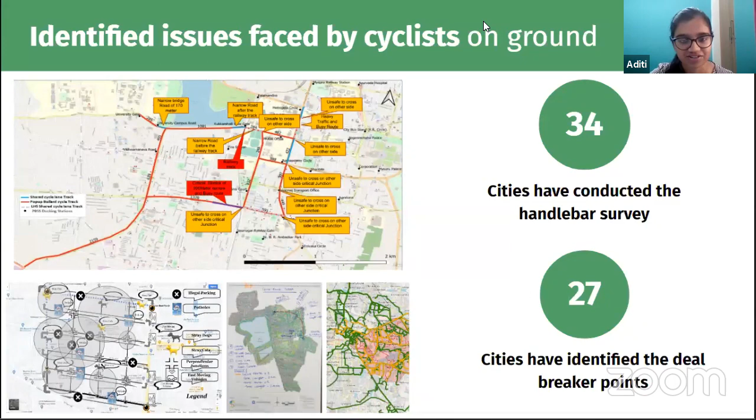Welcome, sir. Thank you so much, Aditi, and a very warm welcome to all the panelists on this panel and also the attendees who are viewing this video conference. Indeed, it's very encouraging to see the poll results first.

I thought, this is the fourth or probably the fifth video conference that we're trying to do, right? So I was thinking that maybe in order to avoid repetition, I will not talk about how good cycling has been and how good this initiative has been. I think the results are for everyone to see. The poll is one such evidence, and data speaks volumes. And I think even within this small subgroup, some of us who have been involved with this challenge, and many of us maybe have not been, but still, it's very encouraging to see the numbers.

Cities have done a lot of effort, and in fact, this is an area wherein not too much discussion was taking place. But over the last few days, ever since this challenge was launched, there has been a lot of buzz that has been created around cycling.

With 45 cities having launched various initiatives to engage citizens from around the country, 15 cities have launched open street campaigns for cycle training. Almost 34 cities have conducted handlebar surveys and identified locations to transform for cycling. Over 370 kilometers of corridor and 400 square kilometers of neighborhood areas have been selected for this cycling transformation that we'll be witnessing over the coming days.

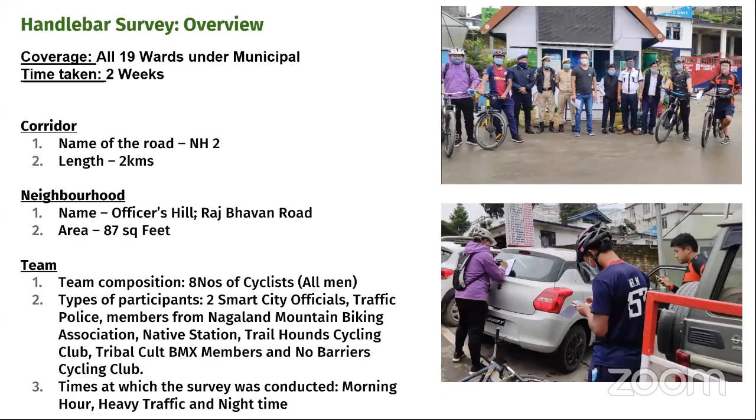As you can see in the slide, the municipal area of Kohima is just about 10 square kilometers, much smaller than other cities in the plains, so it was easier for us to survey the entire municipal roads in a short span of time.

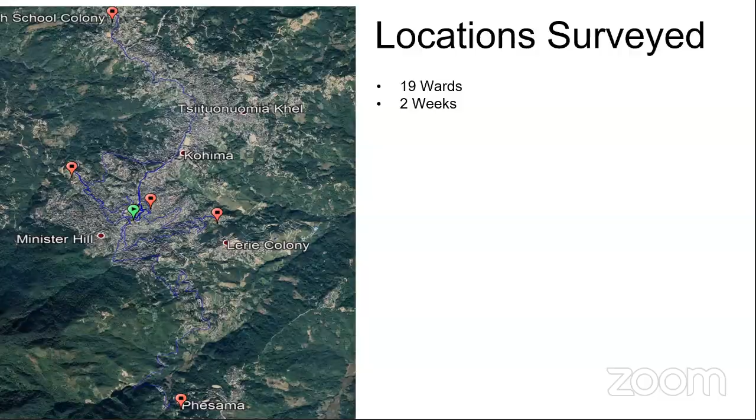Here are some of the photos captured during the survey. Out of the surveyed locations, we have selected this corridor for the pilot. The reasons for selection are that the identified stretch connects 2 major markets in Kohima, the BOC market area in the extreme south and the town area market in the north, and this lies on the central spine of the city's morphology.

Besides that, we have 2 multi-level car parking facilities coming up under smart city projects, both on the north and south. Hence we plan to implement a bicycle rental scheme once they are completed. The concept is: people come to the city in their cars, park in the multi-level car parking facility, and right there we will introduce rental bikes for city commute. That's the concept behind selecting this corridor.

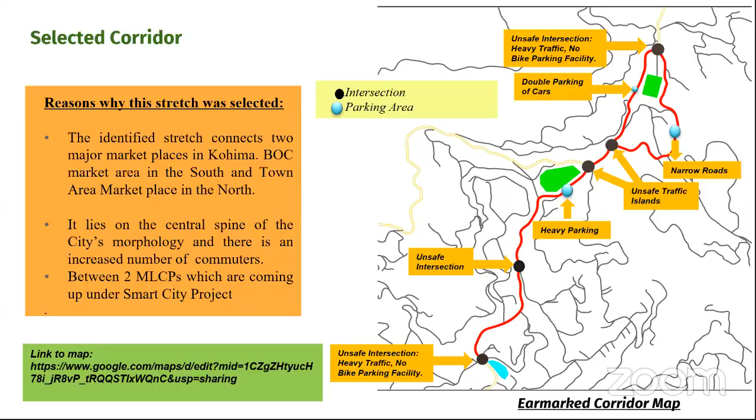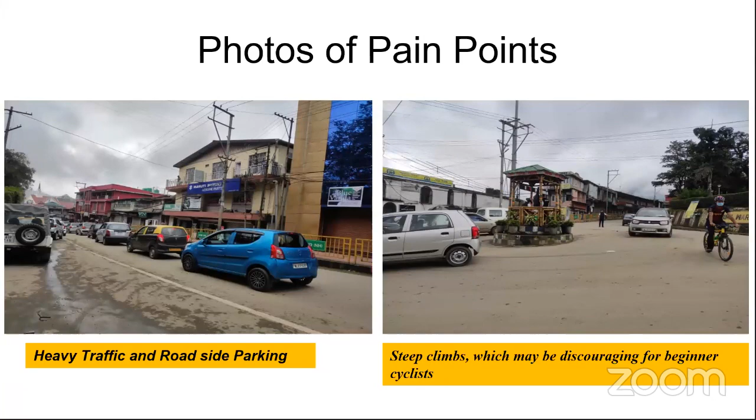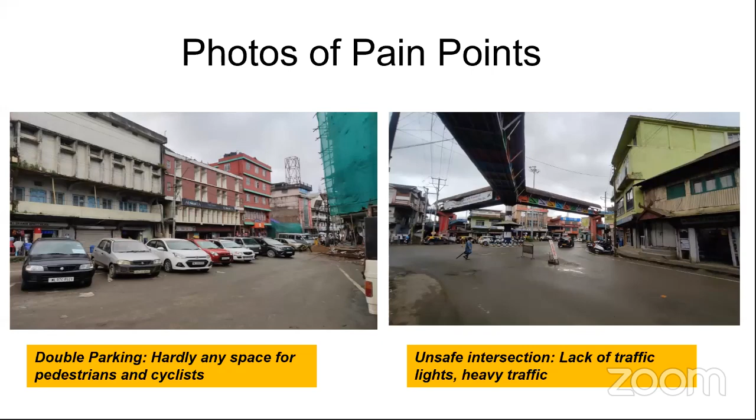We have also identified and marked some pain points from the Handlebar survey, such as heavy traffic, roadside parking, and steep climbs which might discourage cyclists. We have double parking happening in most of the stretches and unsafe intersections, such as intersections without traffic lights and with heavy traffic. These are some of the pain points we identified.

Coming to the identification of neighborhood, we identified one for the pilot, just adjacent to the corridor as per the guidelines. The reason for selecting this neighborhood is that citizens from all walks of life gather here for recreational activities like running, cycling, and jogging, and the place comes to life particularly in the evening with young people gathering for fitness activities. It is pertinent to undertake an urban transformation intervention in this heritage circle by providing basic infrastructure like proper lighting, exercise bars, and cycle stands with greeneries, which can set a new benchmark towards achieving Kohima's urban transformation objectives.

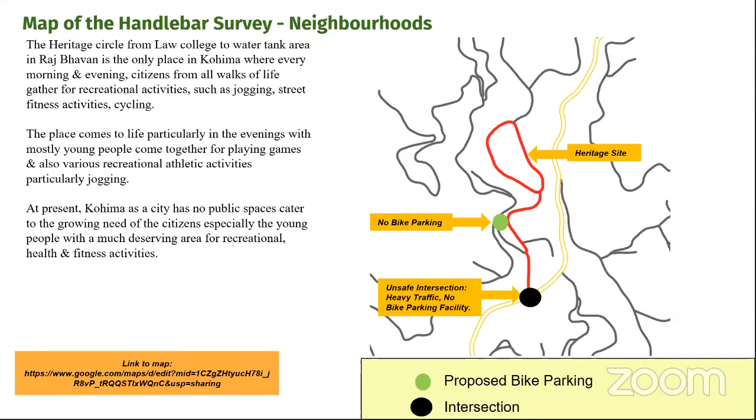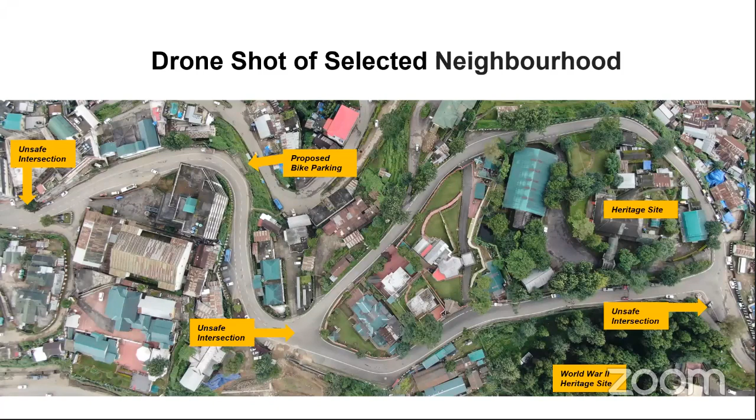2 major deal breakers which we have identified are poor lighting, which makes it extremely unsafe to ride in the evening or at night, and unmanaged and unregulated traffic, with overspeeding of cars in the narrow roads. Those are the 2 major deal breakers Kohima identified from the Handlebar survey.

We've also taken a short analysis from all the surveys conducted. Kohima's strengths include community participation, it's very safe for women to be on the roads even in the evening and at night, and we have good urban roads and a friendly neighborhood. Some weaknesses are poor street lighting and limited road width for cycle lanes, since Kohima is not like other metropolitan cities—it's a hill station, and the roads are quite narrow to have dedicated cycling infrastructure.

Some opportunities are a large, enthusiastic younger generation, and hub-and-spoke cycling trails within and around Kohima for adventure tourism. Kohima Smart City is also exploring ways to promote mountain biking as part of cycling for adventure tourism. The threats include unregulated vehicle traffic, unsafe intersections, double parking, and potholes in some of the interiors of Kohima.

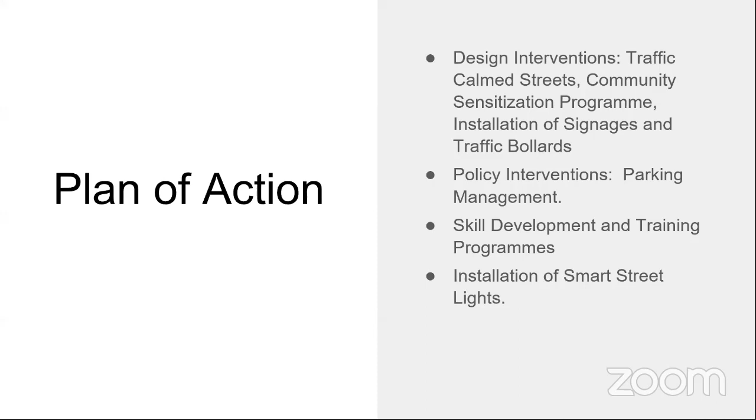Thanks a lot, Atoba. That was a very nice presentation about what you have done so far under the Handlebar survey and some ideas on how to take things forward. I would like to ask you a question about what do you think would be your principal challenges in now moving from the Handlebar survey towards creating design solutions and implementing them?

One major issue which we would face is for the parking facilities. We have actually two multi-level car parking facilities, which is coming up under the smart city project, but which will be completed only after 2 years. So now to have a traffic management system in place, and given the fact that we have shops all across the roads in Kohima, we really need to take into account the opinions of the stakeholders, of the public, to take certain policy decisions to help manage the traffic and the parking around Kohima.

Sure. So we would later in the session today speak about parking, because parking is quite a vexing issue which many cities are dealing with, and it's critical that we get parking right if we want to get cycling right.

So the question I would have next for you, Atoba, is who are the stakeholders? As in you said, you would have to work with the shopkeepers. Who else do you think you need to work with to make sure that you could have a successful parking management system? Yes, as far as Kohima is concerned, the stakeholders will be the shop owners, first of all, and then the second would be the land owners.

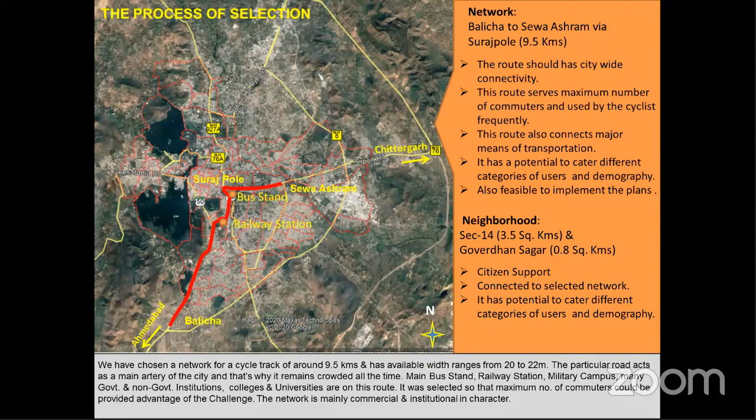For the neighborhood, we chose two neighborhoods. Neighborhood 1 is called Sector 14, the largest residential sector of Udaipur. It contains neighborhood schools, colleges, institutions, clinics, commercial sub-centers, etc. Since it is the largest residential sector, we got very good citizen support from this site.

We also preferred this route as it is connected to a selected network, so we wanted an end-to-end approach or circle to promote this. Also, it has potential to cater to all categories of users and demography.

In the second neighborhood, there is a water body called Goverdhan Sagar. It served as a major tourist point for both citizens and tourists. People actually walk, cycle, and jog around the Sagar daily in the morning and evening.

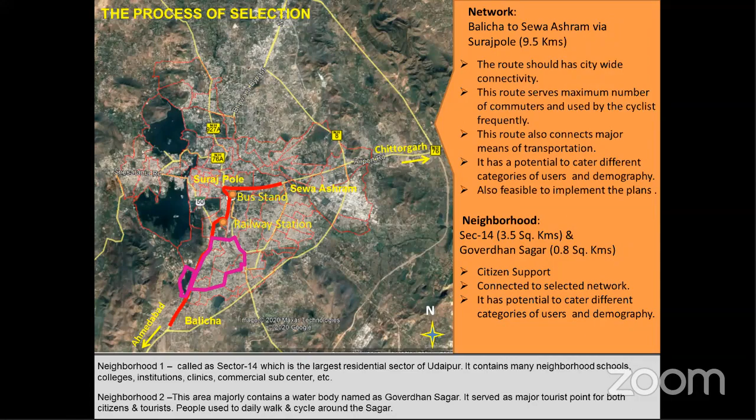Coming to the Handlebar Survey, before conducting it on the ground, we went for various meetings with stakeholders - traffic police department, citizen representatives, city officials. On the left side, these are some images we shared while conducting meetings, both official and non-official.

Parallelly, we also went through feedback forms using an online method. We took support of Instagram, Facebook, and Twitter so that we could reach the maximum number of people and get the maximum number of suggestions from citizens.

We also framed WhatsApp messages to forward to both official and non-official groups. The major agenda was to reach the maximum number of people. We also approached various schools and colleges to get suggestions from students' and teachers' points of view.

We also prepared a base map for that area so we could locate schools and colleges, government institutions, non-government facilities, amenities, and the local market area.

So we conducted the Handlebar survey. On my right side, these are some images we shared which were clicked while conducting the Handlebar survey.

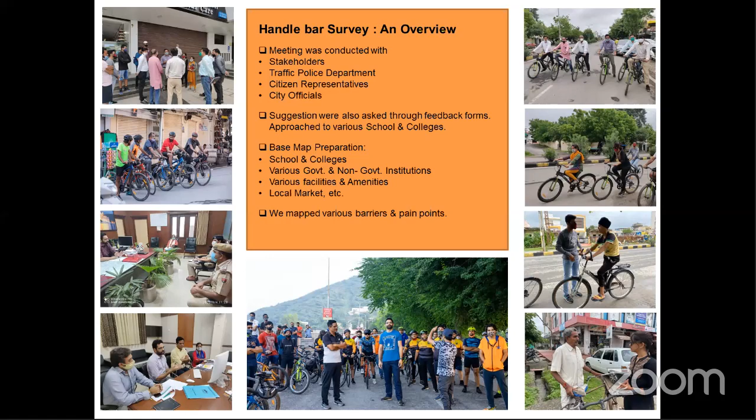We came to know about various points, pain points, and barriers, and we mapped it on paper. This is a 9.5-kilometer stretch. We found various pain points such as fast moving traffic, dangerous junctions, blind turns, obstruction by parking, hawkers, and many more.

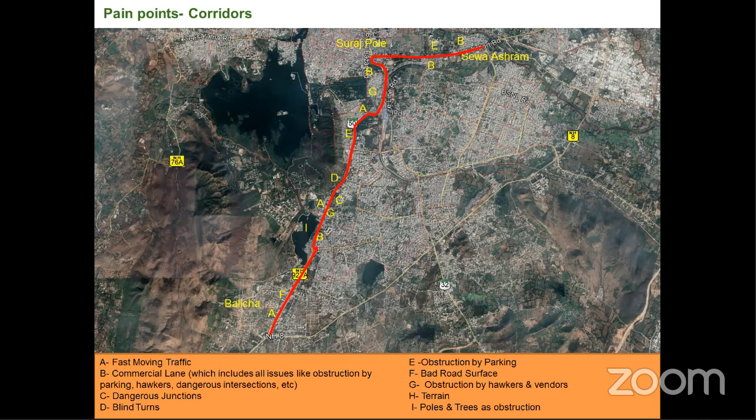Coming to specific points, in the first image the road width is good, around 10 to 11 meters. After a carriageway of 7.5 meters, still space is left, and therefore vehicles move at very high speed over there. So it needs a plan to ensure cyclist safety.

In the second picture, you can see it is a commercial lane. The carriageway is not that much, hardly 8 to 9 meters, yet vehicles still move at very high speed over there.

The third image is an intersection at Suraj Pole. As you can see, there is movement of heavy vehicles, which leads to congestion and again raises a question mark for cyclist safety.

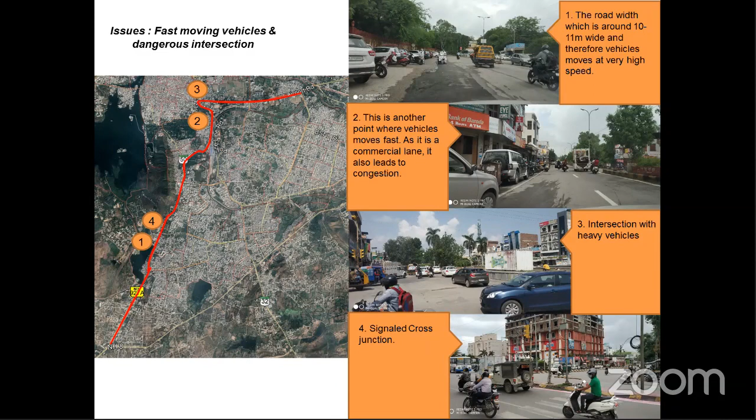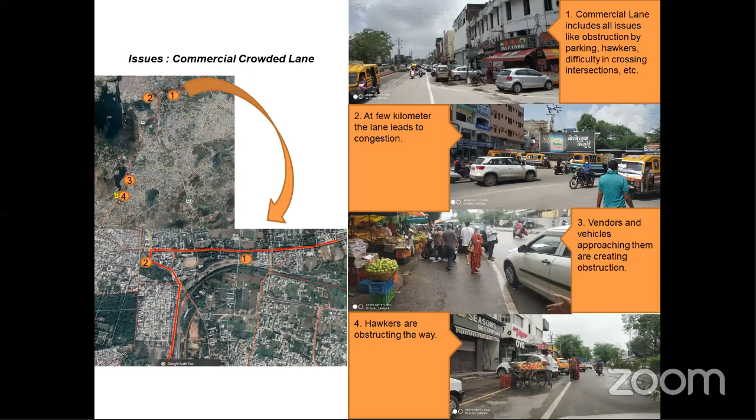Like in the third image, you can see a vending zone on the left side, and cars approach it for the stuff, creating obstructions.

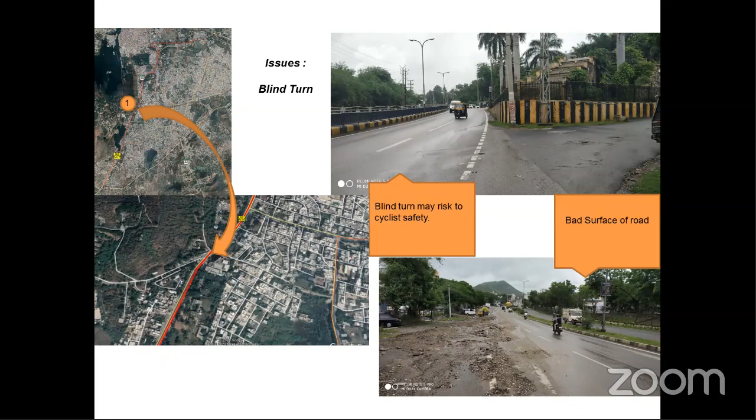We also found a few blind turns and bad surface of the road at some points of the route. Also, poles and trees are creating obstruction at some points of the road. So if we are proposing a cycling route along the left side, it will need a different plan for that area.

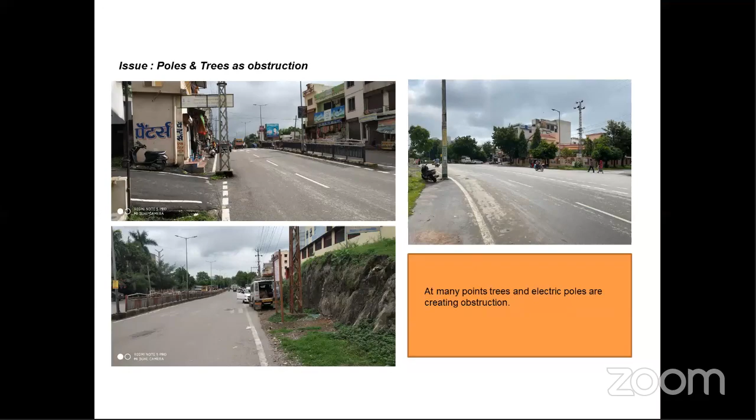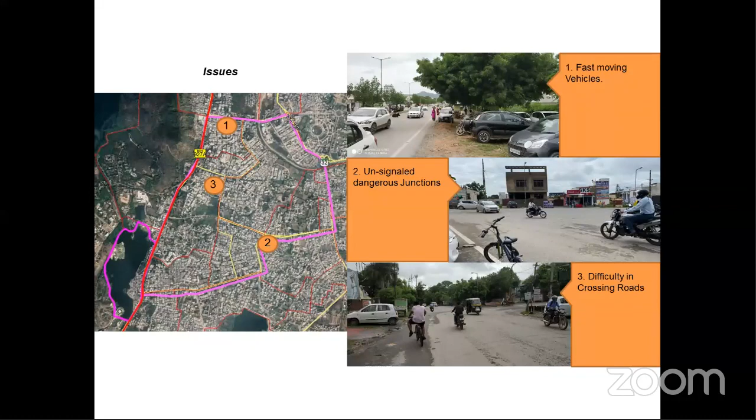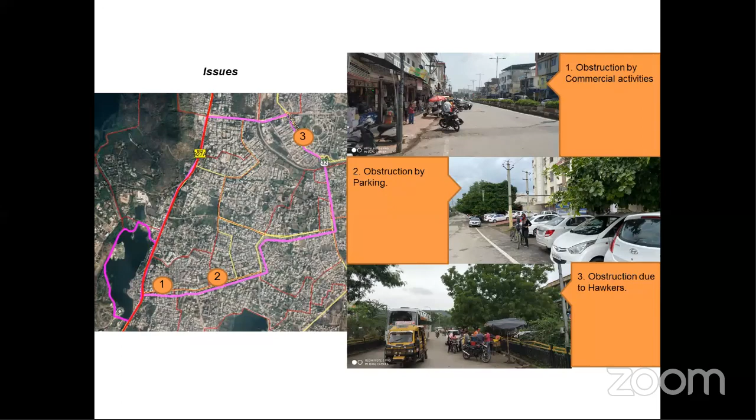In this neighborhood, a commercial zone is also there, so the problems are the same - encroachment activities are going on there. In the second image, you can see cars parked outside the campus, outside the flat campus, for visitor parking - the cars parking is outside, again creating an obstruction on the road. In the third picture, you see obstruction by hawkers.

In this first image, as you all know, Udaipur is a hilly town, but it is confined to merely a walled city. So in this neighborhood, still we found at some places the site is undulating, which again needs consideration. In the second picture, you again see trees and poles obstructing the way.

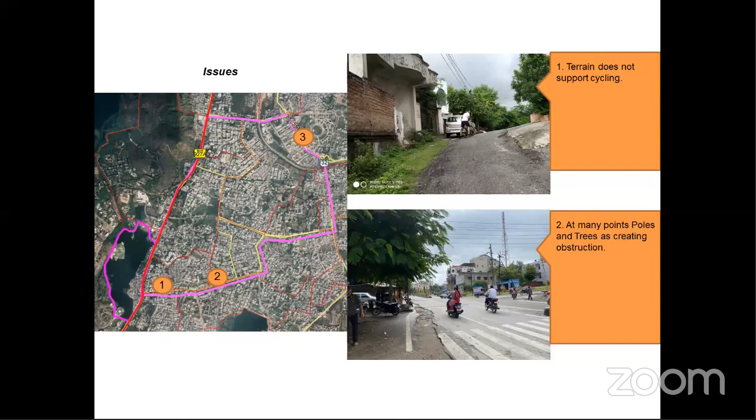So among all these pain points, we came out with the deal breakers, which actually create a situation where it completely avoids cycling on those routes - dangerous cross junctions, heavy movement of vehicles, commercial activities which we need to regulate in parallel, and last but not the least, unsignaled intersections. So we are looking forward for the solutions. Thank you.

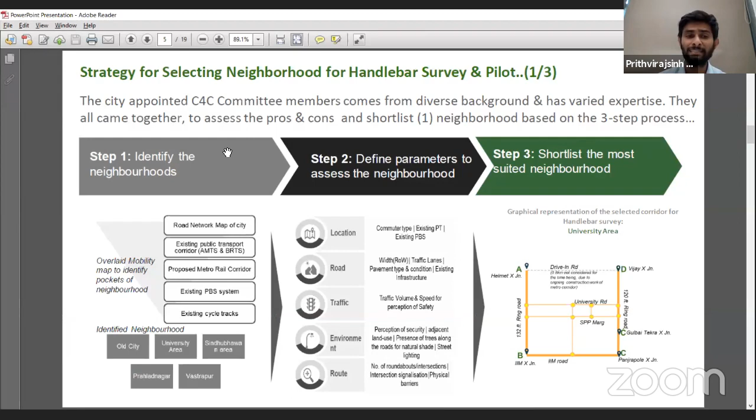So Ahmedabad Smart City took time in formulating a core team with diversity across city officials, PMC, knowledge experts, design experts, and also our PBS operators and cycling groups. Due to this core committee, we conducted a Handlebar survey. During the survey, we identified first 5 corridors, and out of these 5 corridors, we have selected 1 corridor as the university area for our proposed intervention.

Let me drill down into the criteria for why we selected this one. First, we already have 3 cycle tracks across the city, but out of these, the university area has a concrete cycle track rather than the Prahlad Nagar cycle track which was paver block. This university area cycle track has a 2.25 meter width, and also we have less commercial establishment adjacent to this cycle track, so we have almost continuity to this cycle track.

Along with these reasons, we have mixed users like the student population because of the university area, LD College, IIM, and also proximity to public transport. We have BRTS, AMTS, and also an upcoming metro route in this university area. Also, Ahmedabad Smart City is a pioneer in Smart City projects - we have the Ahmedabad Bike project as a public bike sharing project, with PBS stations where Yulu and MYBYK PBS operators are also there.

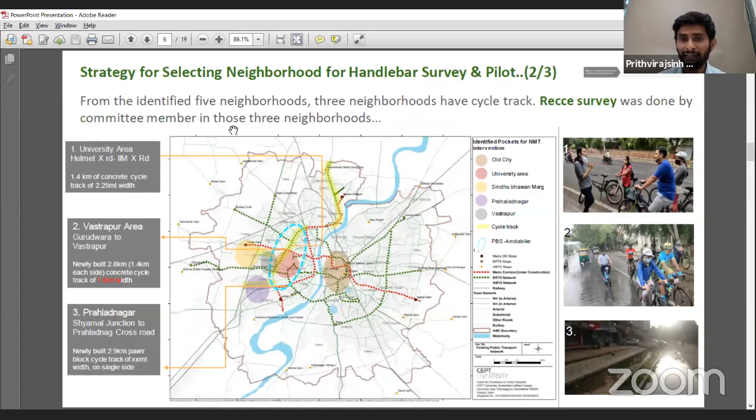Specific to the road, in this corridor we have sections A to B, B to C, and C to D. I'll just talk about A to B corridor length - we have 1.4 kilometer corridor length, and in total we have 8.3 kilometer corridor length, with surrounding around 2 kilometer square area as neighborhood. In terms of traffic, environment, and route, all this suggests that the university area is the perfect intervention to go ahead with. We also have around 5 junctions and 9 T-junctions, which would be good lessons for Smart City Ahmedabad from a design perspective.

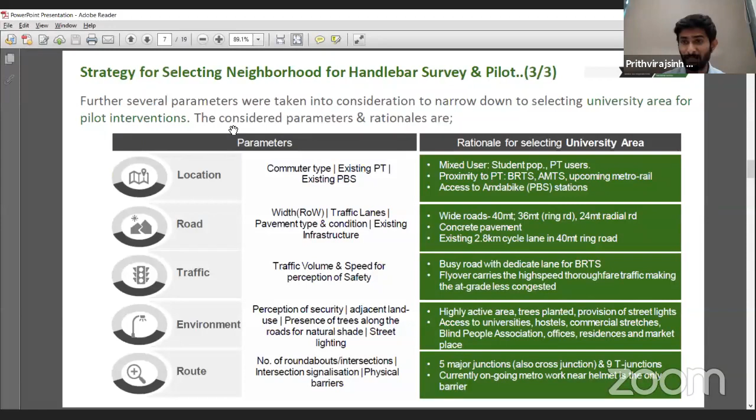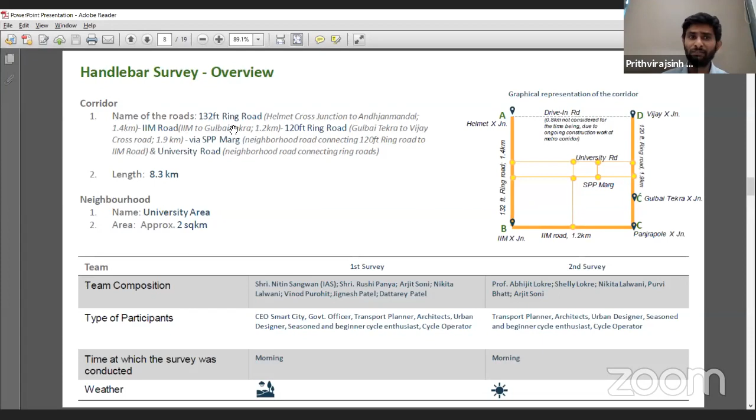We have done the Handlebar survey 2 times - first in rainy conditions in the morning, and second with clear cloud conditions with our survey team. We have identified some deal breaker points, 5 to 6 of them. Let me go through it. First, the existing cycle track is being used by 2-wheelers, not by cyclists.

Because there are many instances where separators are broken, due to which people on 2-wheelers are just using this cycle track rather than the main road. In many instances, manholes were raised and also broken, the surface is uneven, due to which the cycling continuity is not being maintained.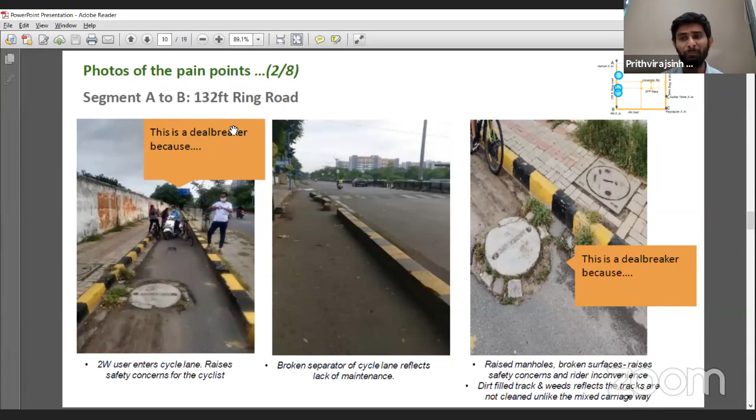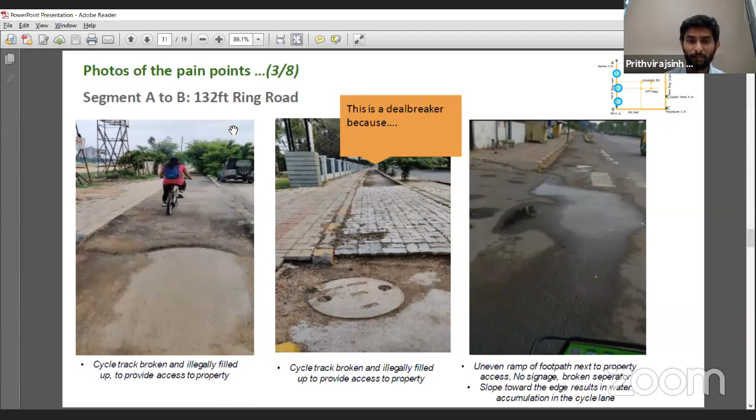Third, there are 2 or 3 premises. To give access to these premises, they have just put paver blocks, as you can see in the second picture. This blocks our continuity to the cycle track, and I think this is the reason why cyclists are not using this cycle track. So we are thinking of ways to make it lucrative for cyclists to use this cycle track.

At T-junctions also, no proper signages are there, and safety concerns are also there.

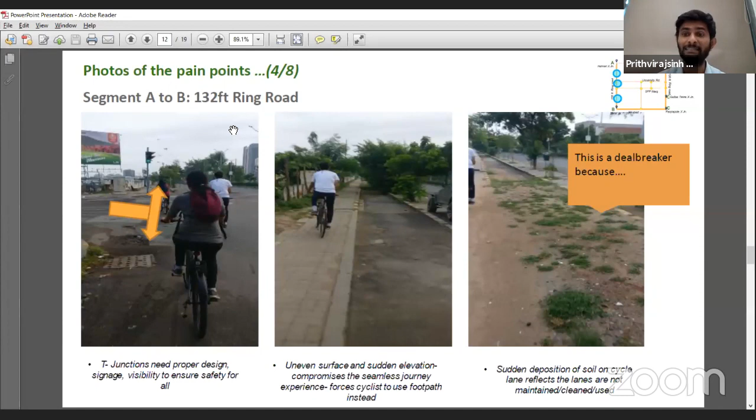That's why people are using... in some places we have a deposition of soil also, due to which you can see that people are forced to use the footpath rather than the cycle track. And in some instances, overgrown and untrimmed trees are also there, due to which they also need to use this footpath.

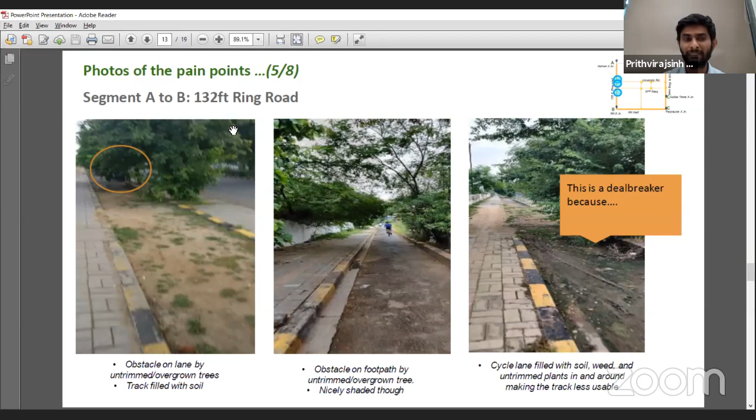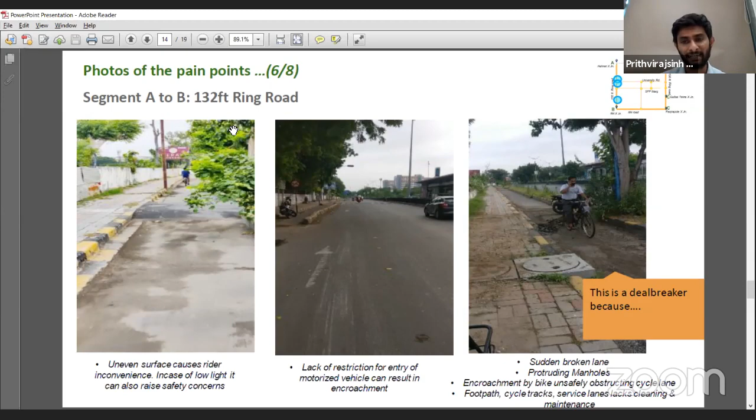Yes, the uneven surface. It's a major reason of inconvenience in using this cycle track, and it's also a major deal breaker point, according to us.

So these are the major deal breaker points. And what intervention are we trying to do for this? We want to allocate a specific personnel who will look after all these things to clear this specific cycle track by repairing potholes, manholes, pruning of plants, weeding, and removal of any ad hoc structures or construction. Also, we want to install bollards or tree separators to restrict the entry of two-wheelers.

We want to increase the signages for the T-junctions. The ultimate objective is the smooth integration of the cycle lane with the junctions. We will also change the look and feel of our existing PBS stations adjacent to this cycle track.

I think that's all from Smart City Ahmedabad.

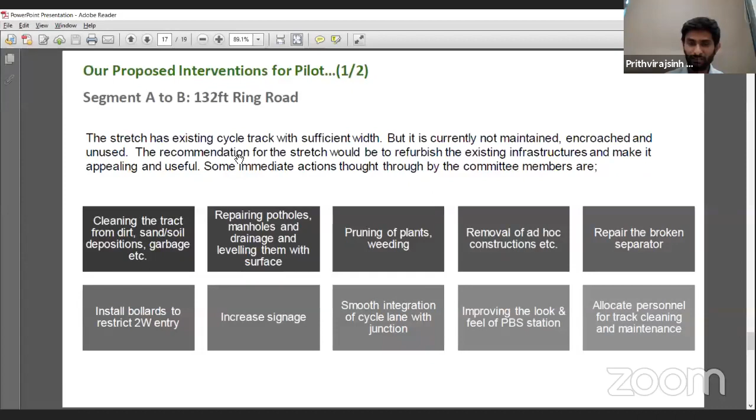Open for questions. Thanks a lot for that quick presentation on Ahmedabad's case. Now, what you've shown here is largely places which already have cycle tracks, like, for example, the 132 feet ring road, which has a cycle track along the BRTS corridor. What you're trying to do is improve an existing cycle track, and I think that's a great step forward, where a piece of infrastructure that you had created in the past was not working, and you're trying to make it work now.

Through the Handlebar survey, you've identified what the issues are. I would also ask, what are the other interventions you're looking at for bringing cycling to other parts of the city? You also identified the whole university neighborhood, and mentioned multiple intersections there. Do you have any thoughts on how you would go about creating ideas or design solutions for that? That's my first question. My second question is, who are the stakeholders you're planning to engage with to get their buy-in? Whose support do you need for this to be a success?

Yes, Shreya, for your first question, our core committee feels that we don't want to just build a cycle track for leisure activity, but rather build it as a behavioral change and commutation cycling track. For this, we have identified that out of these 3 existing cycle tracks, if we can refurbish them and attract people to use them as a regular commute rather than leisure, it would be a success for Smart City Ahmedabad.

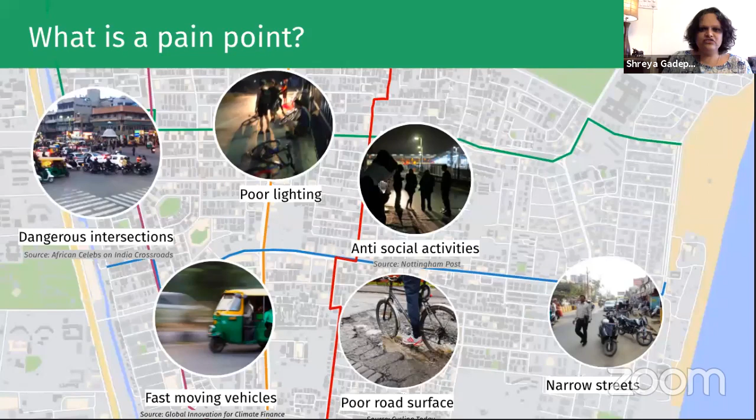Sounds good, sounds good. So let's look at some key takeaways. The first thing is, what is a pain point, right? And we need to remember that a pain point is not an issue, it's an issue at a certain specific point, and that's why it's a pain point. You might have a variety of pain points.

Say, antisocial activities which are happening in darkness, on dark streets, and that can be dangerous, especially for women. That might be a deal breaker, that pretty much no woman would like to ride on that section of the street, or even men might be, for that matter, quite afraid, or even kids and others, and therefore that might be a deal breaker. Or let's look at the issue of extremely high speeds, where a cyclist might feel very unsafe to be on that street. That might be a deal breaker in a certain case. So remember that this might be just a pain point in a certain situation if the differential is not very high, but at that particular point, it might be a pain point, or that pain point might become a deal breaker, and so on and so forth.

Now narrow streets - some of you have pointed out narrow streets as being a pain point. I would say that a narrow street is not a pain point by itself, or narrow streets are not pain points by themselves.

The issue instead is maybe it's encroached by parking, or maybe there is high-speed traffic that hinders the movement of cyclists. And what can you do about it? The solutions would be about how you address the question of parking.

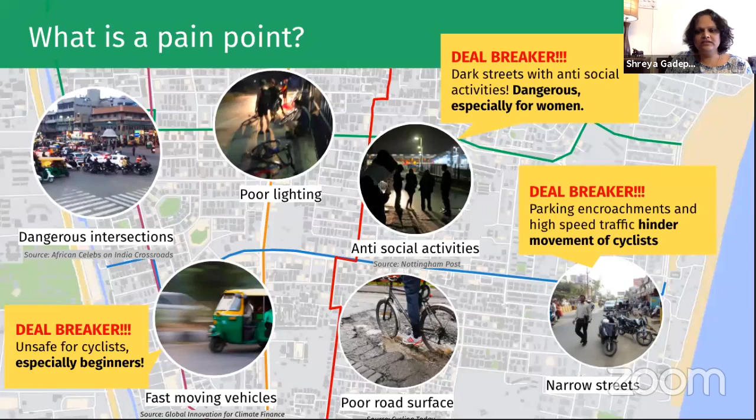How do you address the question of slowing down traffic to make cyclists and motor vehicles coexist and go safely? Keep this in mind as you do your own handlebar surveys. Like I had requested our panelists today, make sure you're doing handlebar surveys at different times of day, in different lighting conditions, with different sets of people, so that you get inputs from a variety of stakeholders at a variety of times and locations, to comprehensively look at what the issues are.

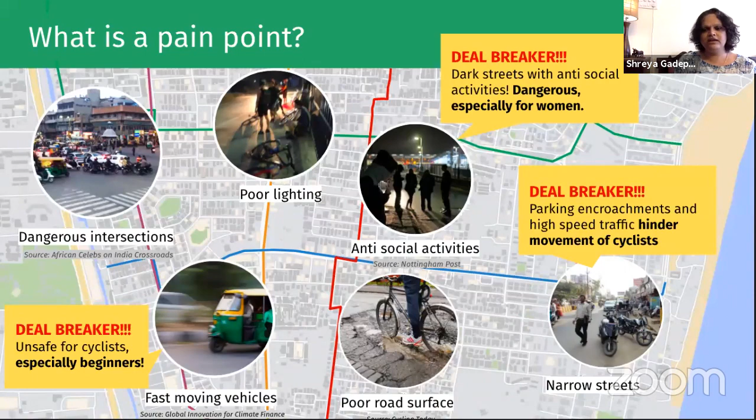Again, try to find what solutions you think might work, try them out, see if they work. If they don't work, try out new solutions.

One of the points that almost all cities have been raising is the issue of parking, that there is parking and that's a concern for cyclists. So what can we do about it?

Let's look at this - this particular picture is from Kohima, but it could be pretty much any city. The parking issue is a super local problem, a very localized problem, where parking oftentimes is concentrated in a few specific spots. You would see double parking happening in a 100-meter section, and right next to it, about 100 meters down the street, you might see no parking there. That's primarily because we're not managing parking.

So people can park wherever they want, often unorganized and haphazard. Parking oftentimes is angular or perpendicular, which occupies more of the right of way of the street, which is already constrained. And lastly, there are in many cases underutilized off-street parking facilities. We've looked at multiple cities in India and found that off-street parking locations are underutilized or unused in many cases. So what can we do about it?

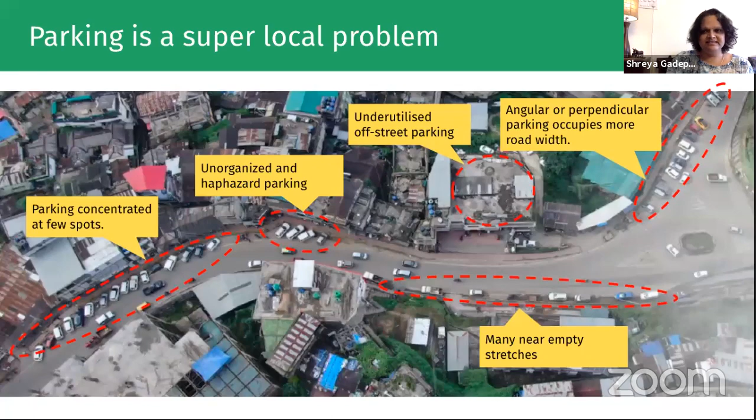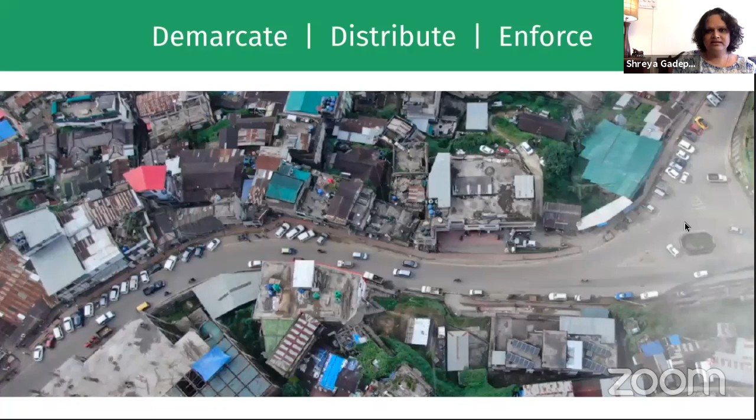Let's start looking at what the solution might be. The first is that you need to start demarcating parking - clearly mark exactly what the slots are and where you can park and where you cannot park.

Where you can park, make sure you're marking slots for cars and two-wheelers separately so they know where they can park. Car parking should be only parallel parking because it occupies less of the right of way. Cycle and two-wheeler parking can be perpendicular, which makes sense because they occupy about the same amount of space. What you need is about 2 meters of right of way where you might be okay accommodating a little bit of parking.

Also remember that you need to distribute parking - rather than all these vehicles parked perpendicular at a certain location or double parked, they could instead be parked in some other location a little further down the street. So start marking parking in other places, finding ways and means to spread the amount of parking in different parts so that it's not concentrated in a few spots, creating a bottleneck.

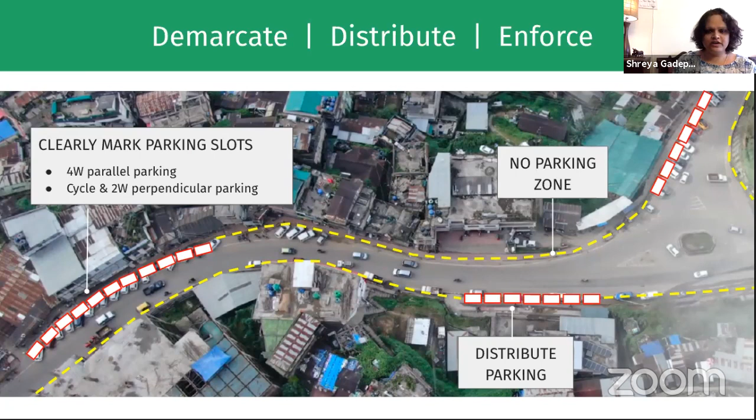Third, make sure there are also clearly marked spots where there is no parking, because you would not want parking there - it obstructs either the movement of vehicles and cycles, or there are other concerns. So the points are: mark, distribute parking, and lastly enforce parking.

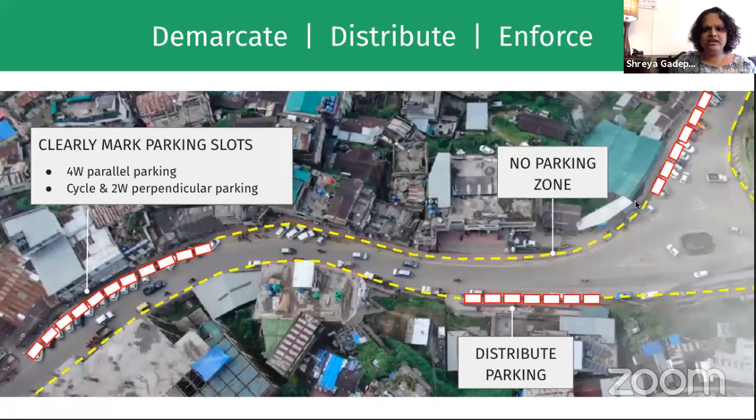Now let's go into how you can actually achieve this. One of the key points here is pricing it right. Unless you put the right price, you may not actually get the right kind of parking.

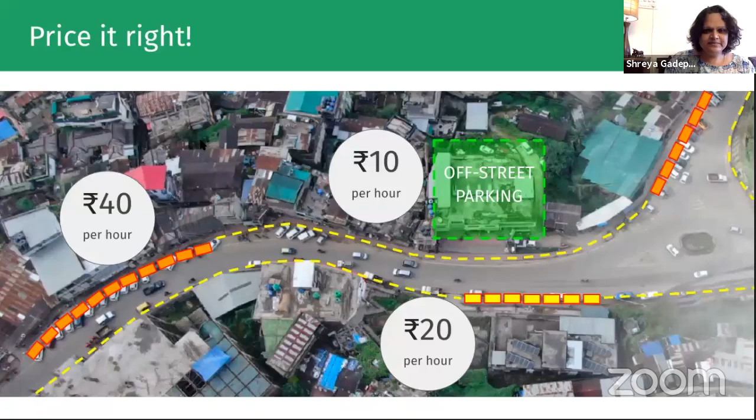So what are the key lessons here? First, prioritize cycle parking and IPT stands - that's not something we went through in the exercise, but they need priority. Second, charge for duration - the longer you park, the more you charge. This discourages long-term parking. Remember that shopkeeper who had to park for 12 hours now parks in the off-street location because it's cheaper rather than on-street, which is premium.

Third, charge high where the demand is high - if demand is very high, make sure you're pricing it high. How much should you charge? Enough to keep at least 15% of the spots vacant. If even at 40 rupees per hour all your slots are getting full, increase the price to 50 rupees to see if 15% of those parking there would choose to park in the yellow or green zone instead. Lastly, make sure cycle parking is free - prioritize that. Your goal is eventually to shift parking from streets to off-street parking locations.

Also another key point, you do not need to make off-street parking yourself as a city. You do not have to build MLCPs. If you start charging for parking on the street, the business of parking off-street will automatically take off. We've seen this in multiple cities, including Indian cities. So do not think that you need to create parking off-street. MLCPs can be a private sector business.

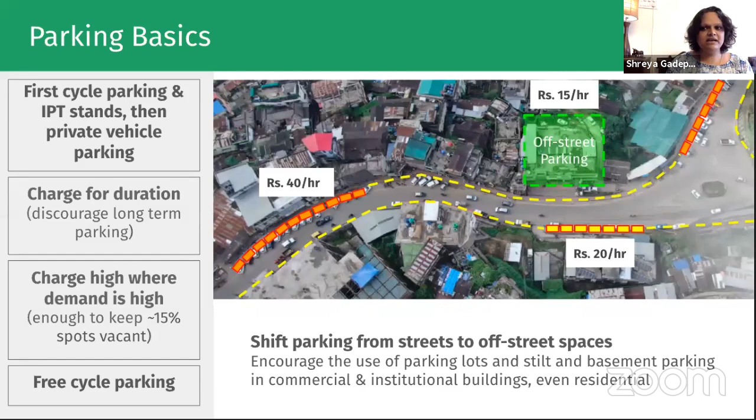Why is that? Imagine government has no business in building parking. Much like how if you were to go and buy an air conditioner and then come out and say, government, I bought an air conditioner, you give me a free house to fit it in. Sounds bizarre, right? But we do the same thing when it comes to a car. We buy a car and then say, government, give me free place to park my car. And I don't want just one place, I want 3 places. One at my home, one at my office, one at the mall or the park or wherever else it is. I want parking everywhere. Parking is a private need of a vehicle owner. You do not have to make it free for them.

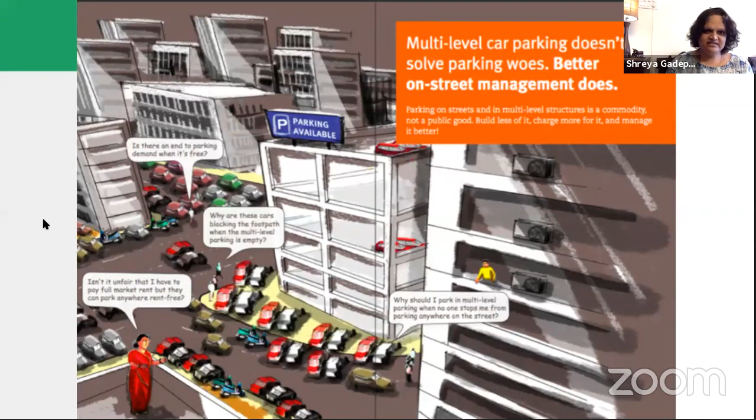Unless you solve the problem of on-street parking management, you will not be able to get private off-street parking working. So key point here: start managing on-street parking and price it higher than off-street parking. That's when you will solve the business of parking. And by doing so, you have a win-win situation. Not only are you clearing up space on the street for cyclists, you're actually getting money to use to create cycling infrastructure. Fun, right?

The second key point is the business of intersections. How do we make intersections safe for cycling? Let's take an intersection which is like mission impossible. You don't know as a cyclist how you would even manage to cross this intersection. Let alone a very capable cyclist also cannot cross this intersection, finds it very difficult because of the complete chaos on the street at the intersection.

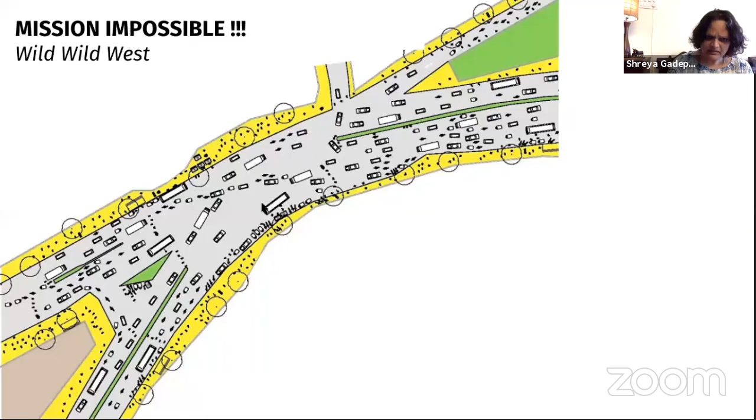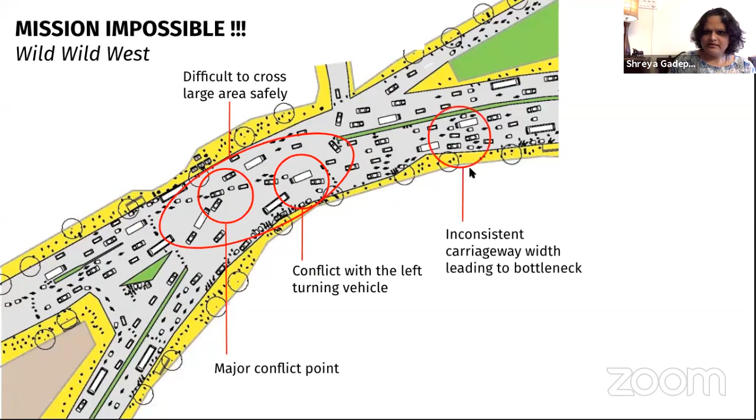What are the issues? First, there are major conflict points and there's a lot of space like a football ground where you don't know how to maneuver and might crash into anything anywhere. Second, there is conflict with left turning vehicles at the bottom, where if a cyclist wants to go straight through and a motor vehicle wants to turn left, that's a big conflict point for a cyclist to resolve. Third, that whole area is difficult to cross because it's such a large area without any delineation. Fourth, there is inconsistent carriageway, which means it narrows down, becomes a bottleneck, and then suddenly vehicles can speed.

Fifth, you have issues where unused space on the street immediately becomes parking, whether it's on the left side, or in the middle of the street right at the intersection, where haphazard parking makes the intersection itself less than ideal. All these issues make it very difficult for somebody to maneuver through this intersection. It's difficult for motorists, and almost impossible for cyclists. So what can you do?

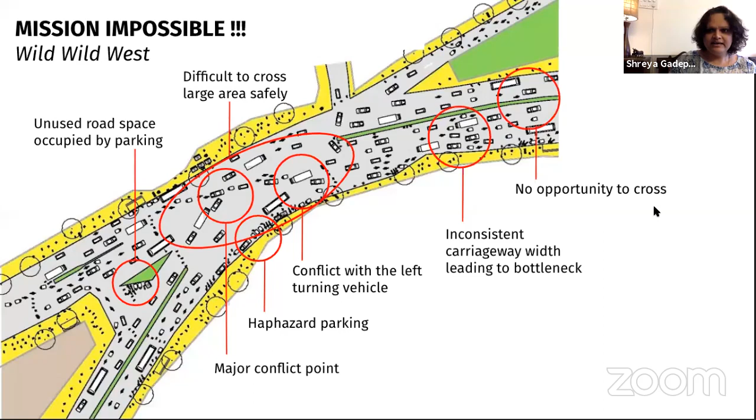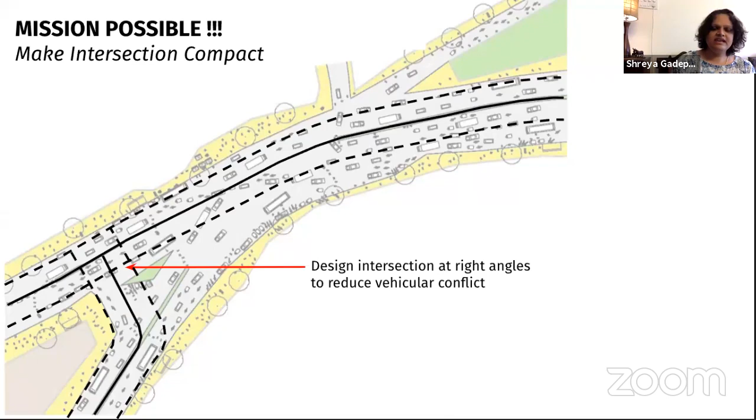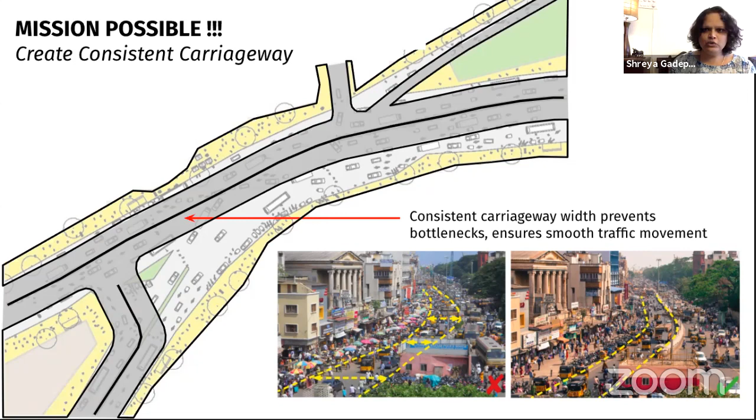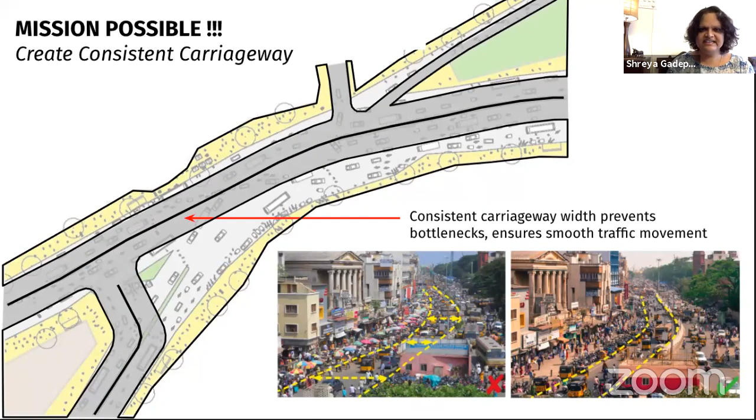Let's start doing something about it. First, let's make intersections compact. The key to solving intersections is to make them smaller and more manageable. Second, make sure the intersection is a right angle intersection as much as possible, because it slows down traffic and makes it easier for cyclists and pedestrians to maneuver through. Then look at a consistent carriageway, make sure it's even. If you have space only for 2 lanes, make sure you have 2 even lanes across the entire length, rather than 3 lanes at some point, 4 lanes somewhere else, and 2 lanes in another location. So, consistent carriageway. Finally, now that you've created that carriageway, you can reclaim a lot of space.

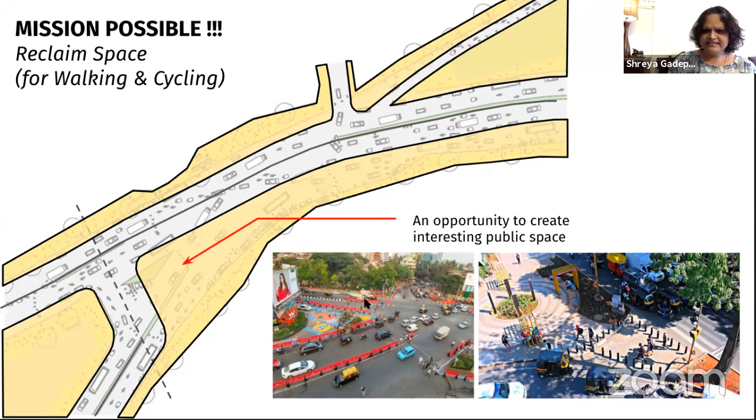Which is presently wasted in a variety of ways and makes it dangerous, into space for walking and cycling. This is what cities have already started doing in India, like with this TU on the left side in Mumbai, or actual infrastructure in Pune and Chennai and many other cities.

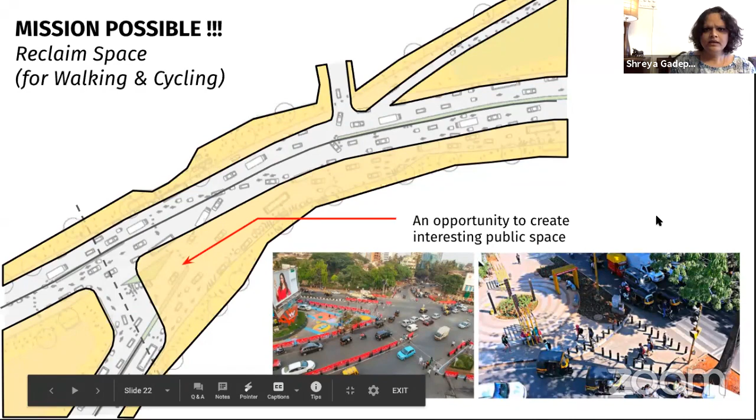What can you do for further making it safe for cycling? Start looking at specific elements, like making sure you create a cycle track where possible. If not, look at other elements like slowing traffic, making sure left turns have small radii, or tabletop crossings which are convenient for pedestrians and also slow traffic so cyclists can go safely. Or even creating certain streets, like on the north side, into cycle-only streets. So there's a variety of ways to make a street safer for cycling, not just cycle tracks, but by resolving the intersection itself.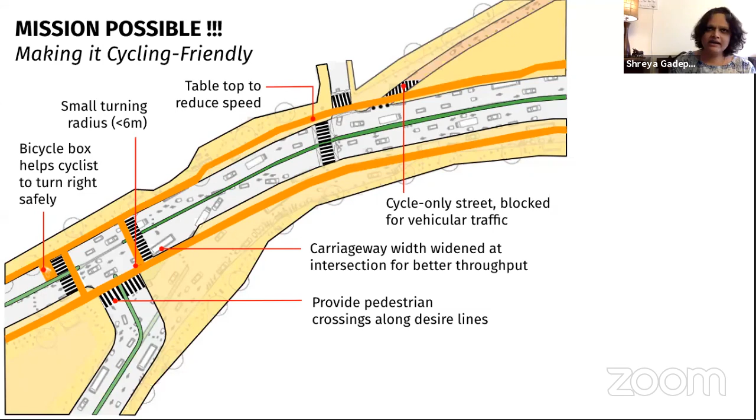A lot of this is actually possible using very temporary measures to test it out, with the same lessons I just spoke about: make a compact intersection, make sure your carriageway is even, and create elements to slow traffic rather than allowing high-speed traffic.

So that's about intersections. Lastly, you've all asked questions about calming narrow streets, and there are a variety of means we've talked about before. You could do speed humps or tabletop crossings to slow them down. You could look at ideas like chicanes to make traffic zigzag and slow down. Or you could create traffic rerouting, allowing certain streets to be cycling-only, or at least limiting access for cut-through motor vehicles.

So this is what you could do, and there are many other ideas we'll share as time goes by. Make sure that in all these cases you have appropriate signage as well, so people know what's happening.

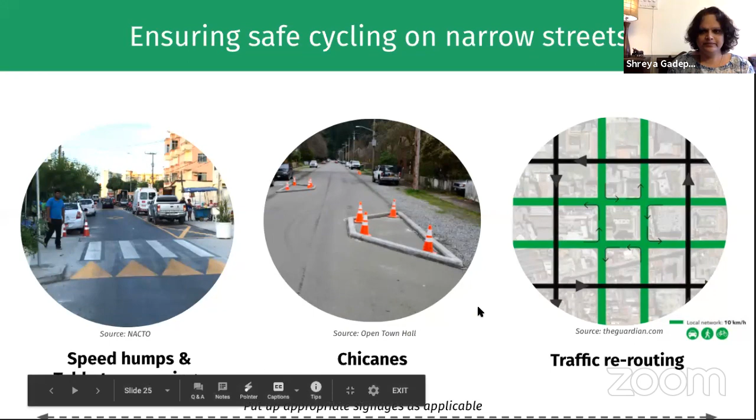How do you go about developing the design? First, identify pain points—some of you have already done that through the Handlebar survey. Make sure you're identifying pain points during daytime, nighttime, at all times, with a variety of stakeholders.

Second, with your design teams, develop designs and check the feasibility of such designs on site. Go to the site, see if it's possible to implement, how you would implement it, and revise the design if needed.

Lastly, make sure you're building support for these solutions with your community—shopkeepers, residents, other stakeholders. Bring them on board so they become your champions rather than opposing once you start testing things out. That's the process of developing design solutions.

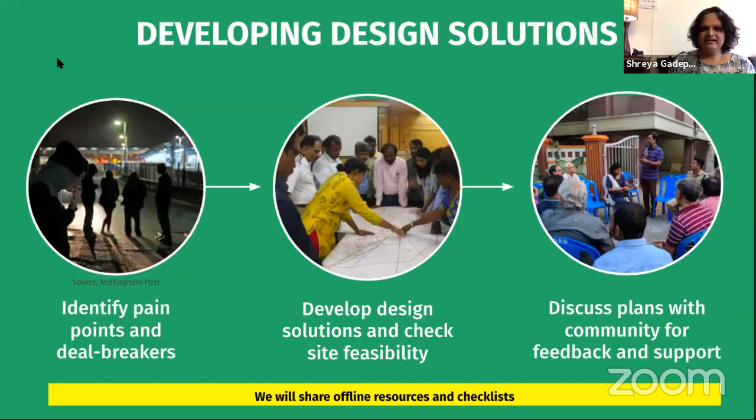So on 2nd October, we are inviting you all to create open streets for cycling, and start a campaign for Cycles for Change. On 2nd October, the man who made sure India became independent—let's bring freedom for cycling to all of India. We've already shared guidelines and templates for how to go about it. You can use these, and if you need more support, please reach out to us.

Between now and the next workshop, we're expecting you to start designing the pilot stretches, both corridors and neighborhoods, conduct site visits to check feasibility, refine designs through expert review sessions, and organize focus group discussions to build support with your community. If you can, start implementing and testing these ideas. But don't forget to keep building momentum through the open streets starting 2nd October, along with other ways you're already pursuing.

Between now and the next workshop, we will send you the presentation and video, along with design solutions for implementing the details. We're sending a design toolkit, a site analysis checklist so you can address all the issues, a qualitative survey template, a guide for site documentation, templates for outreach, and guidance on Streetmix for creating cross sections to try out various ideas.